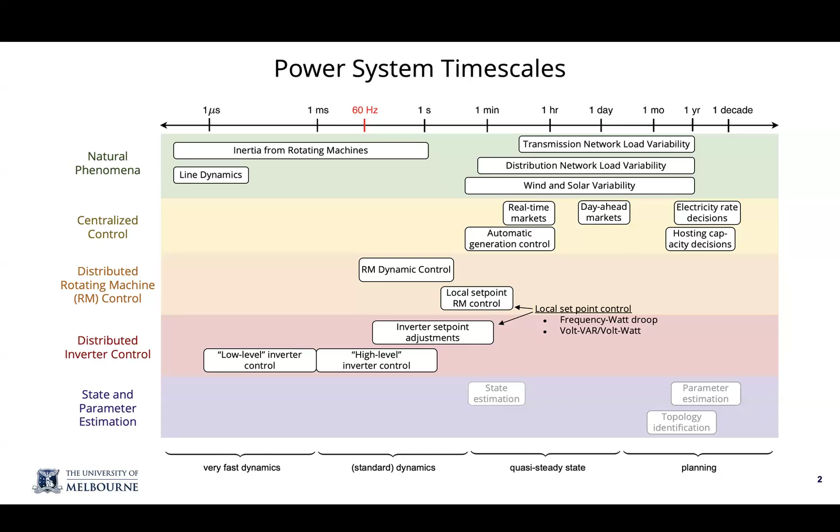This is a slide I made at the end of my PhD trying to make sense of power systems research. It makes the point that power systems research spans multiple timescales, from microseconds, considering switching frequencies of high-performance inverters, to decades, considering the planning decisions we're expected to make. If you're interested in control or optimization theory, you can find something to apply your work to somewhere in this plot.

This was my PhD focus: distribution network variability and wind and solar variability, particularly on distribution networks and how we control active distribution networks so that we can get more EV chargers or rooftop solar plants onto the network.

I left this slide in the talk so I could point out that the bottom portion, the state estimation, parameter estimation, and topology identification work, was heavily influenced by Deep's work when I discovered it in my PhD, but he's not here, so he doesn't get that shout out in person.

Anyways, this was the focus of my postdoc research. In my postdoc, I focused on dynamics, specifically how do we stabilize the electric grid on faster timescales when we lose the inertia from rotating machines. If you work in power systems, this won't be surprising. If you don't, I'll give a bit of an explanation in a bit.

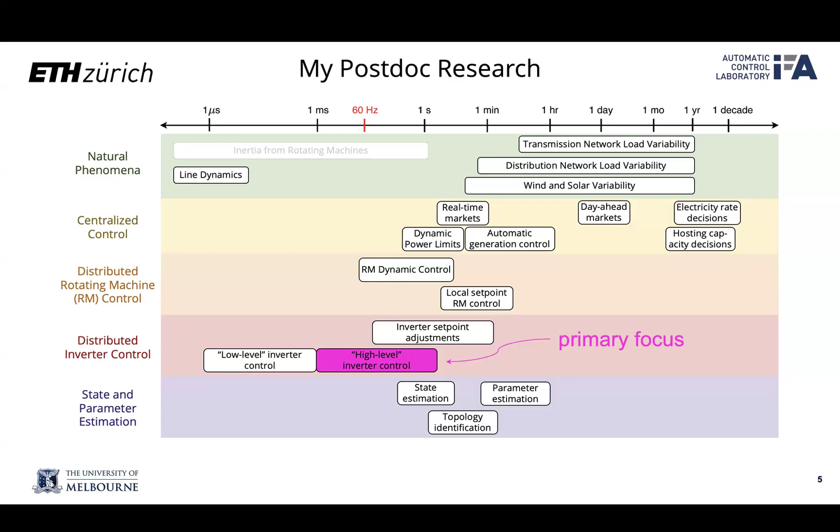It's my hypothesis, and many others as well, that much of the burden for this loss of inertia will fall on the high-level inverter control. So how do we control these inverters so that the grid stays stable, even as we lose the dynamics of rotating machines? My research is broader than that.

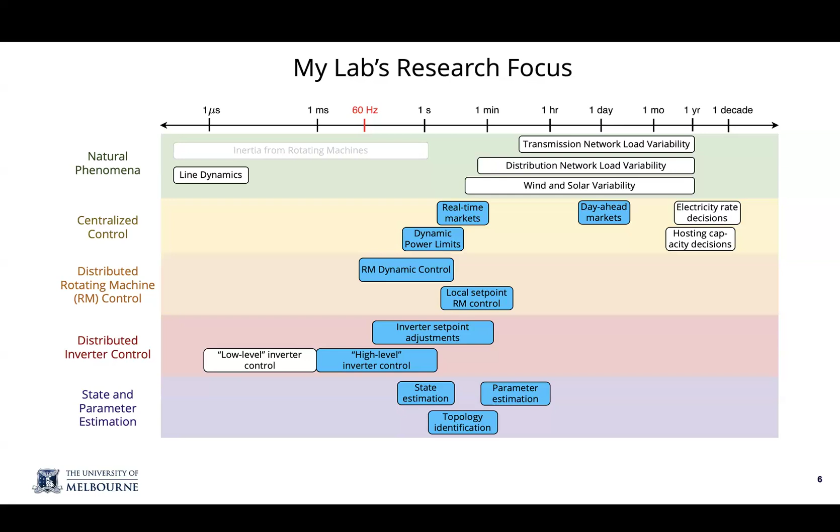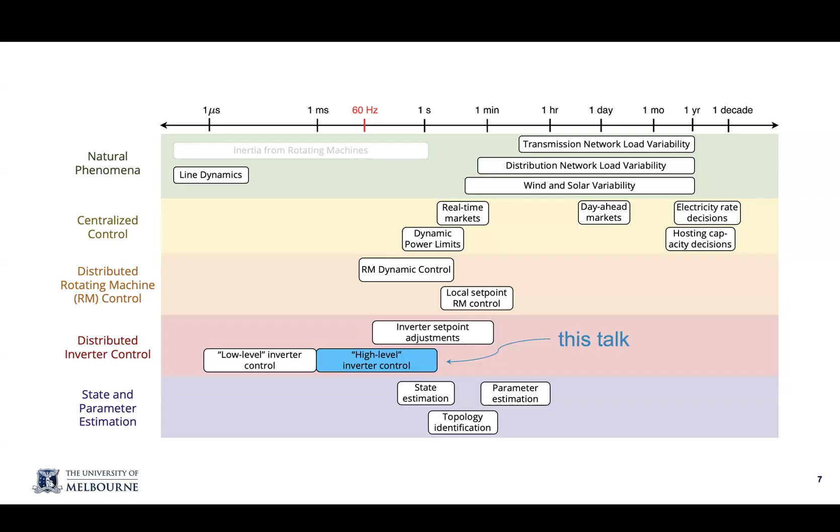I'm also interested in markets, including day-ahead and real-time markets, but this talk will stay focused on grid stability and high-level inverter control, because at least at the moment, I think this is something we really have to resolve in order to keep the cost of renewable electrification down, and for grid resiliency.

These are some of my colleagues. Perhaps you recognize some of them. Florian gave a talk here last year, I think. I also have some Hitachi Energy colleagues who I've worked with in industry, and Professor Fuso, a professor in Italy, and Anurag at TU Munich, who's helped me with hardware experiments.

So here's a bit of background for people who aren't power systems researchers. We have large rotating machines, gas plants, coal plants, hydro plants, where you spin a magnet inside of another magnet that's attached to the grid, and that creates electric power.

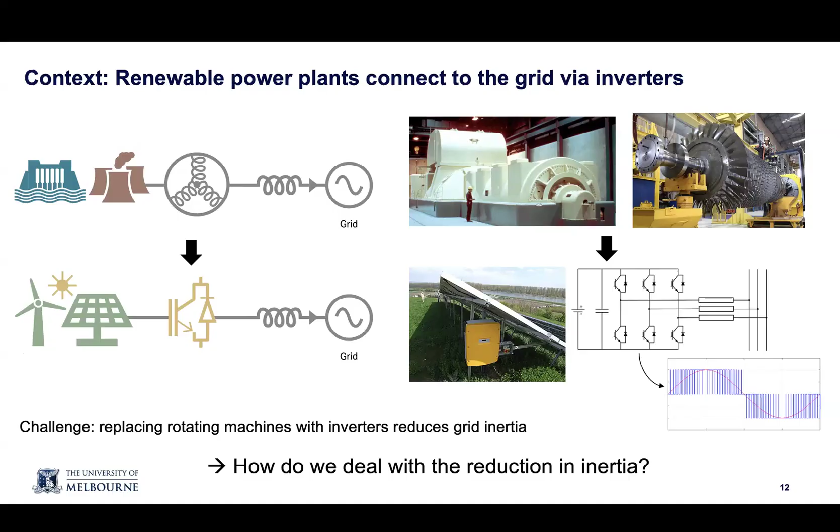So it's a very rich question. Our question as engineers isn't so much where did the oscillations come from, it's more how do we deal with the oscillations, or how do we deal with the reduction in inertia?

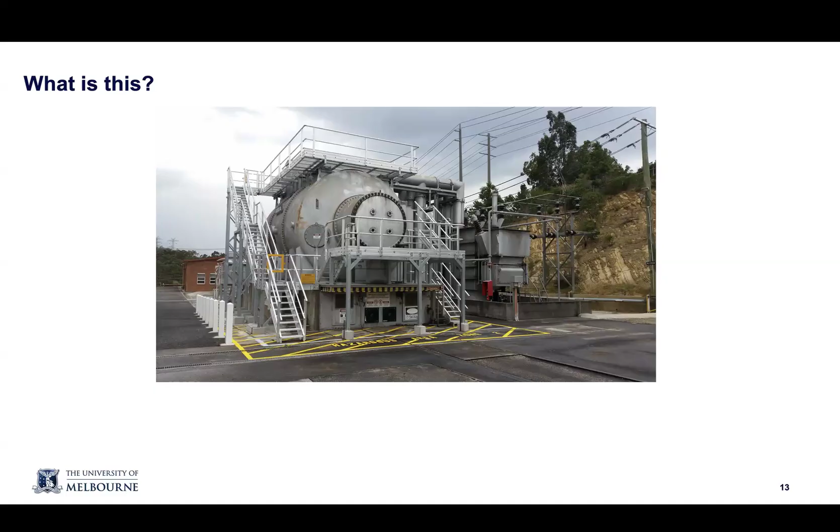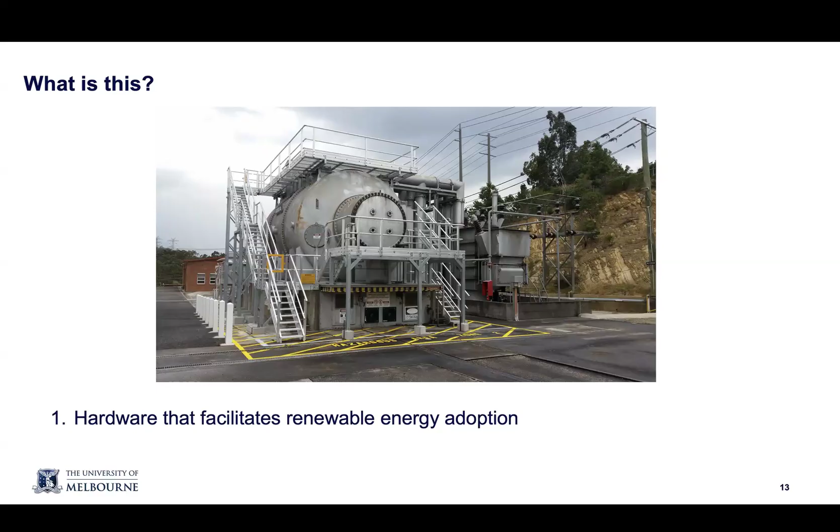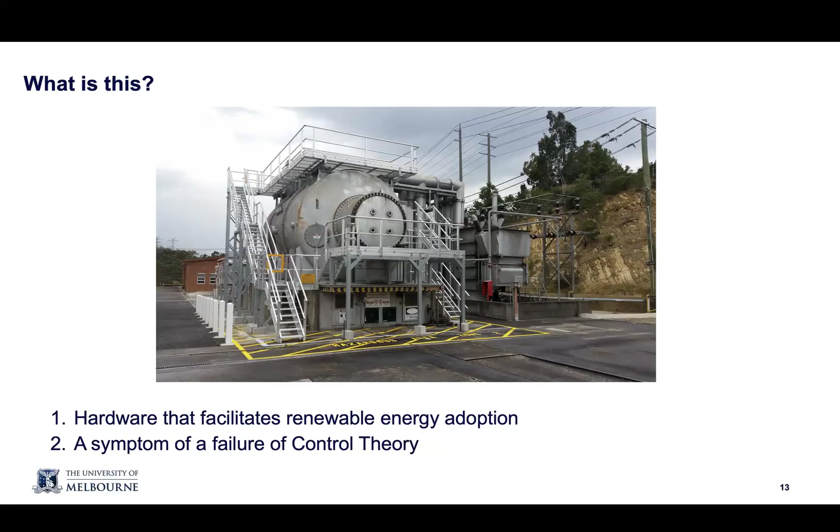Now these devices are coming back into fashion for the reason that was just asked, which is you can just build inertia. You can just attach it and you don't have to deal with the expensive burning of things to push on the turbine blades. So it could be seen as hardware that facilitates renewable energy adoption. However, as control engineers, or perhaps optimization, machine learning theorists, it could be a symptom of a failure of control theory. So I see this as a beautiful piece of machinery, but also a sign that we're not doing our jobs.

So this is the thesis of this talk: inertia is good, but we do not need it. Instead, we must get inverter control right. And I will present a new inverter control method that might be a good idea. I'm not saying this is definitely a good idea, it's kind of a weird way of controlling inverters, and it might be a good way to do things.

We're trying to figure that out and working pretty hard on it. That will include two applications - one with industry and then one with a couple academic labs.

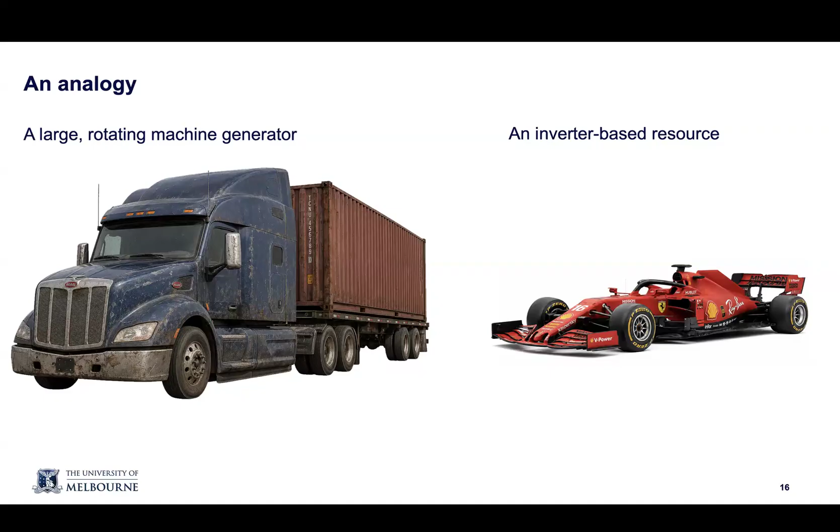This is a slide I made in response to a recent grant application response that said this is wrong, you need inertia for stability, everyone has already known that. So I made this slide, which said that this is the inertia for inertia's sake solution - we're trying to make an F1 car act like a semi-truck, and that's not really what we need to do. So it's kind of just to make a point, but this is a simulation I ran on the Kundur system with a master student at ETH, where we showed that replacing generators with IBRs can indeed produce oscillation.

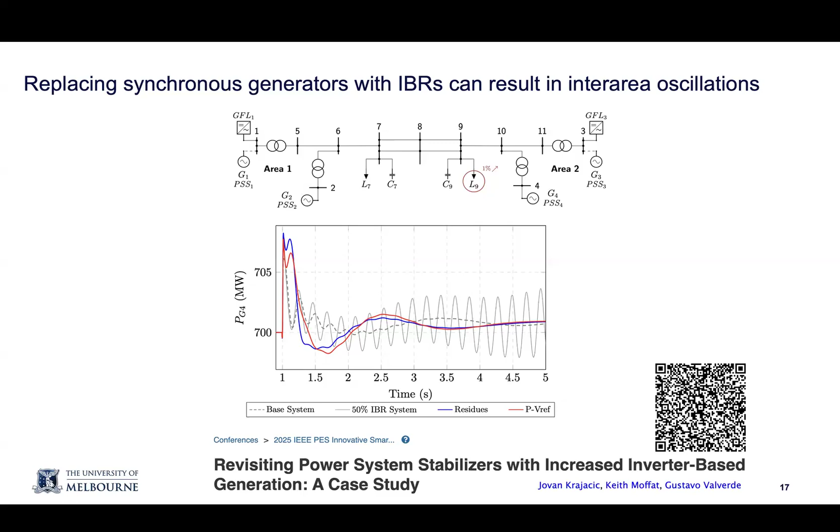So if you're removing inertia and instead putting in inverters, and then you have a fault, you get that grey line that can oscillate, and standard power system stabilizing control will not stabilize the system. It turns out if you just redesign those power system stabilizers, because you still have two rotating machines, you can stabilize the grid. So this brings it back to: if we do control right, we can handle a lot more inverters on the network rather than just throwing up our hands and saying we need this inertia.

Maybe, so from what I remember, the inverters stabilize it because they have this rotating inertia, right? Or rather the rotating machines will. The rotating machines have this rotating mass, so it has these nice synchronization and stabilization characteristics combined with a huge energy buffer in that rotating mass. Right, which is similar to this droop control, no? Well, it's kind of related. The swing equation and droop control are kind of the two parts that are the backbone of grid stability, and have been since the first AC grid.

So they work together basically, yeah, and the nice thing is that this reacts instantaneously without you needing to do anything. But could you not do the same with inverters if you switch in fast? Yeah, you can absolutely. I mean that's kind of the point I'm making: you can do droop control with an inverter, and then you don't need inertia.

It turns out there are many considerations there, because if you're responding very quickly, you might be exciting other dynamics. You have inverters interacting with one another, and everything on the grid is connected to everything else. So you need to be careful if you're driving around one car very fast, basically, or responding at a high bandwidth control speed.

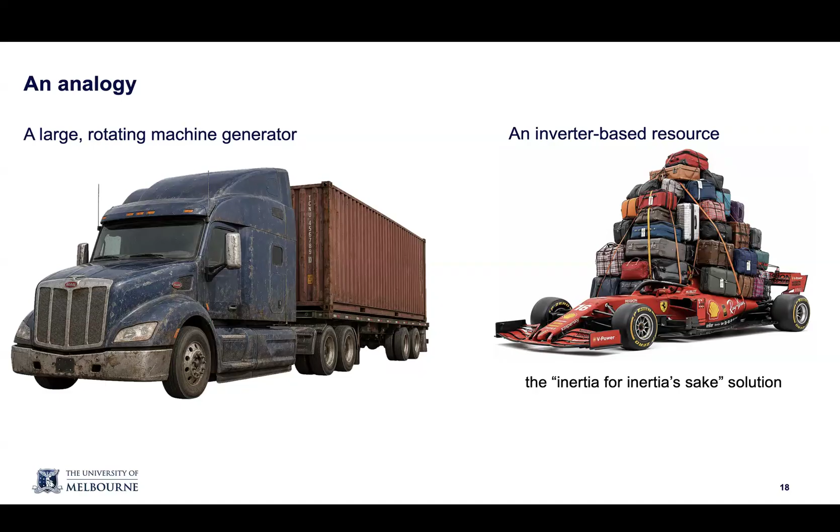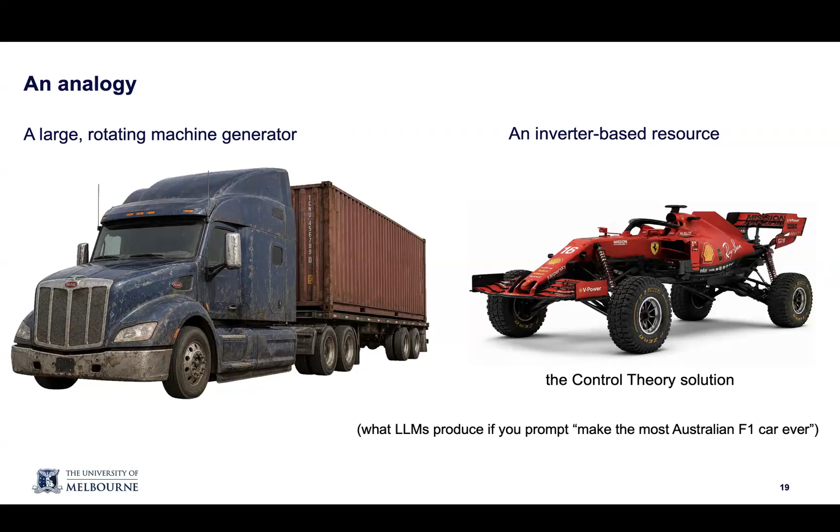But we're trying to figure out what exactly this control theory solution is rather than just a meme. So let's jump into the first application, which is inter-area oscillation damping with an HVDC line. This is when I say I will present a new control method that might be a good idea, which is on the right of this slide. On the left, we have the standard inverter control.

Almost all inverters on the grid, probably every inverter on the grid, are controlled with a box on the left: a tiered or hierarchical control scheme with low-level PWM control, then current control wrapping that, and then power control of some form wrapping around that. That power control is doing some sort of feedback control, maybe with its own time-scale separation and hierarchy, but basically you're determining the input as a function of your output. I put a Nyquist diagram there to indicate this is traditional SISO feedback-type control. You have various control loops and it works pretty well, but it might not be the control method we need because this hierarchy might be too slow, to your point.

Instead, I'm proposing optimization-based inverter control. It's essentially a time-domain predictive-type controller, so we have an MPC formulation here. Except instead of the model, we just have the word 'dynamics model' in brackets. The purpose of this talk is how do we figure out what dynamics model to use in our time-domain optimization in order to control this inverter using an online time-domain optimization. Is there any questions about this? This is, I would say, the high-level idea. Does it make sense more or less?

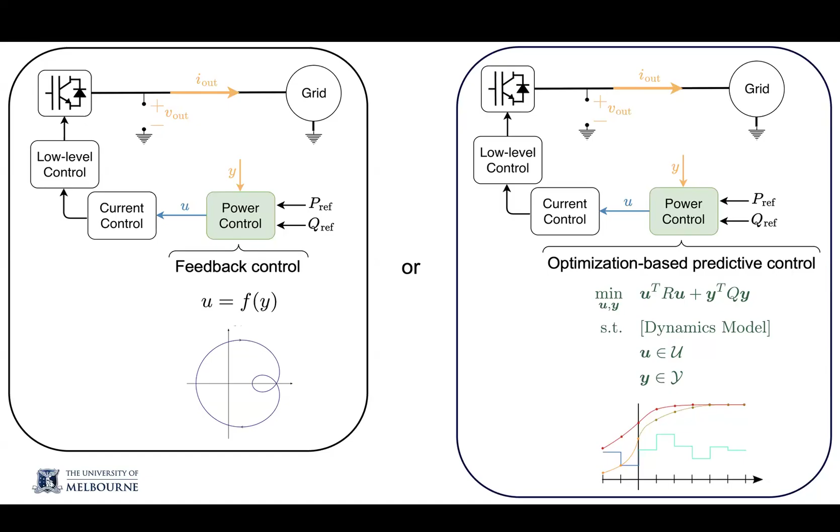So it's a local model. I'll get into what I mean by that. But first, let's say why do something different.

The first, and I would say this is really the key reason, is that we have explicit output constraints. These inverters can't go past a certain output current, and that is a critical limit of that hardware. So we can program that in explicitly.

The second is that it allows for intuitive objective programming. Here we have the cost function, which is just a quadratic cost function. If you're using too much control effort, you just increase that R matrix, or if you really need to settle faster, you can increase the Q matrix. It's kind of standard MPC or LQR motivations here.

And then the third motivation is that MIMO is easy, right? Standard Nyquist-based methods are typically SISO, single input single output. Whereas the electric grid at any point of interconnection is at least 2 by 2, because you're working in a rotating reference, at least the D and Q components of the balanced 3. So the challenges arise: one, how do we do prediction, and two, what is the online optimization?

So the answer to the first one is that we're going to use data-driven predictive control.

Can you say something about what the time horizon is? Because U is a vector, right? So I guess... Exactly. So this asserts a time horizon, whereas in traditional feedback frequency domain type control, you don't have a time horizon. Whereas in MPC, you always have this time horizon. And the time horizon needs to be long enough to capture the dynamics or constraint violations that you care about, but not so long that the optimization becomes intractable, meaning that it will be forecasted. Exactly, yeah. Okay, so it's a generic time horizon that we pick suitably.

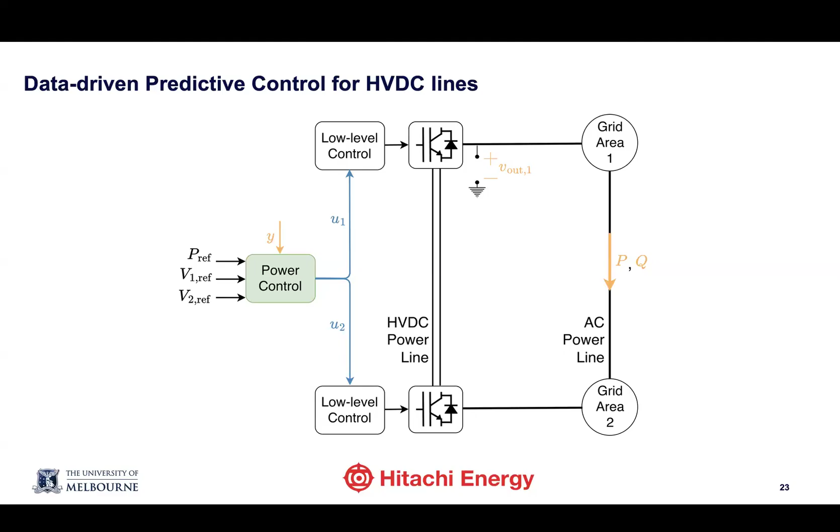Now, the idea is, can we use power control sent to inverters on either side of the HVDC line so that the inverter injections dampen the oscillations? And this is a problem that Hitachi is interested in, because Hitachi builds HVDC. So if they can provide plug-and-play solutions to customers, that's of value to them.

So this is their grid model that they use. This is a toy, this is not an actual grid model. It's just the Kundur 2-area system copy and pasted above and below, connected through one AC line and one DC line. So it looks like that system I just had up, and they have their proprietary HVDC inverters in their model.

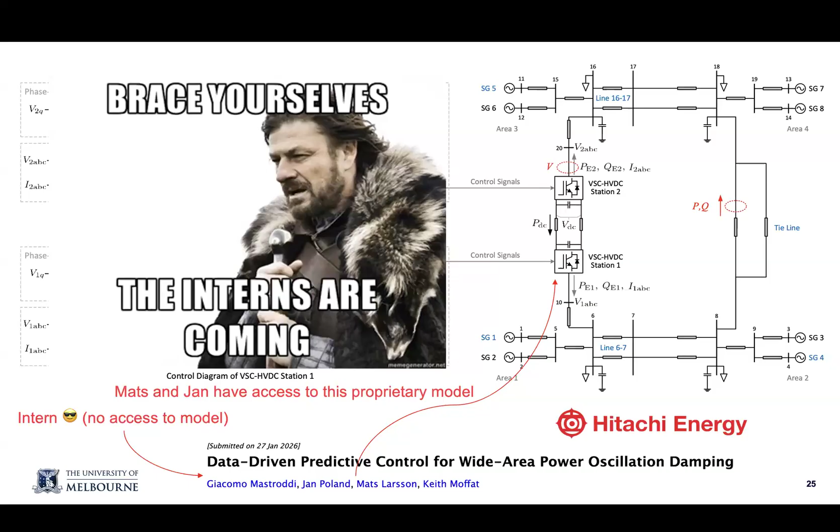It turns out that access to those converter models depends on what stage of engineer you are at Hitachi. This is a core trade secret, how they control these inverters. Giacomo, a student I worked with, described the model as super top secret. They never even considered letting me look at it. I wouldn't have wanted to anyway because I probably couldn't understand it. Whereas Mats and Jan probably can see it, but they're not allowed to share it. It's NDA, essentially.

So the idea is, can we control these inverters at these high-level inputs? Can we give voltage references or power references at a higher level, and then learn the dynamics of the lower-level controller and of the grid at the same time? So we're not just learning the lower-level controllers, we're also learning the aggregate behavior of the whole system as seen through the points of connection for this HVDC line, such that we can dampen the grid oscillations.

The problem is you need an accurate system model to get this plot, and in practice we do not have models of the grid of this accuracy. So when those AEMO engineers were saying, well, we don't know exactly what's happening, it's because they have a pretty good model of the grid, but then you actually have the true physical system, and there's always a mismatch between the two.

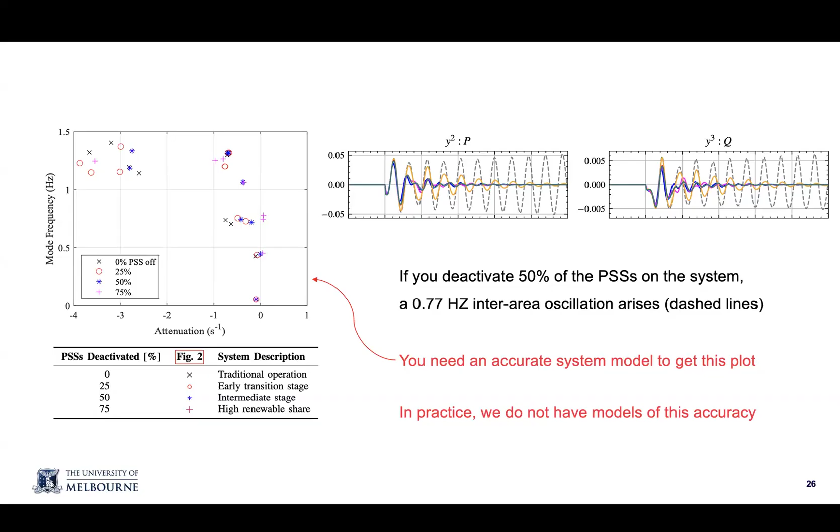Lunch was served, so I'm going to make some progress.

This is a slide from a different talk I give on the eras of control theory - kind of a fun history of control theory talk, making the point that we're now in a new era where we've departed from the state space era, where we worked with A, B, C matrices with a clearly defined state dimension. Now we're trying to control systems that don't have a clearly defined state or even state dimension. If you're controlling an inverter connecting to the electric grid, you have no idea what the state of the electric grid is or even what dimension it might be. We're trying to control this incredibly complex interconnected system, and it's not clear exactly where we would even start if we wanted to identify A, B, C matrices.

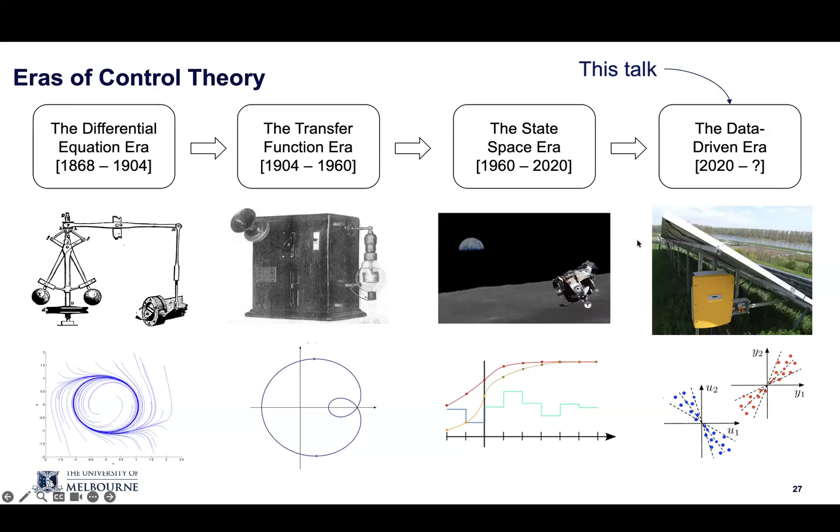So that's going to be this talk, and there are two types of data-driven predictive control methods: the indirect or more classical type approach, and the direct, which is what we're going to focus on in this talk. The indirect approach includes subspace identification, or if you've ever used the N4SID algorithm in MATLAB, where you identify A, B, C, D matrices up to some similarity transform - this is the more classical Lennart Ljung indirect approach where you're going through a state space.

So will you have different models for different situations, and then you have like different linearizations of your nonlinear system? Yeah, we had an L4DC paper probably being presented right now on that. That's an active area of research, and it's a super exciting area because LTI methods work, right? And they're somehow explainable, although the world isn't LTI, so it's always a given.

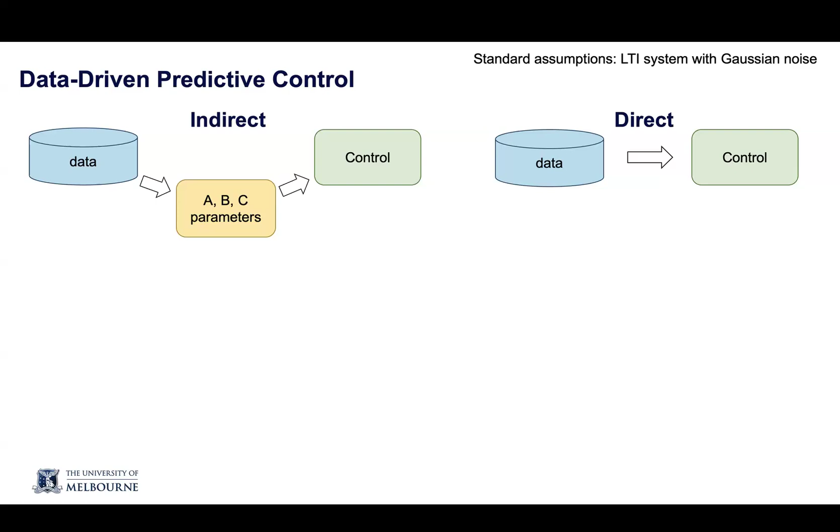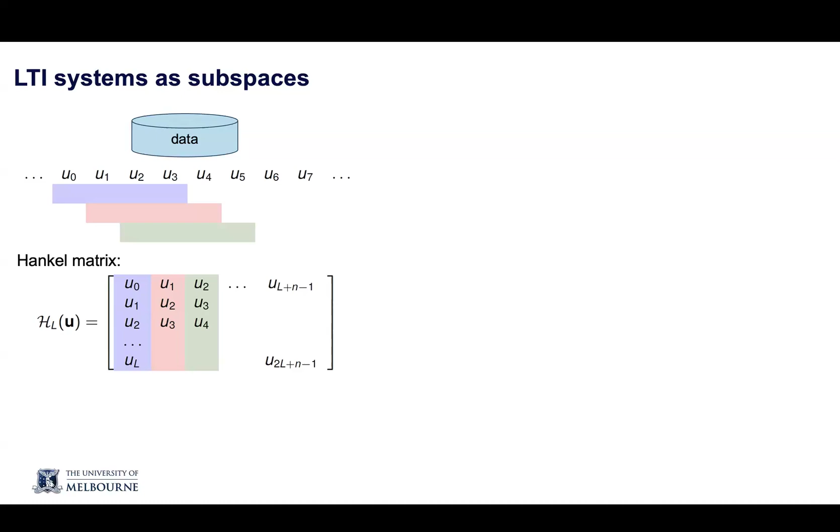So just a bit of background on what we mean by direct control. This is a Hankel matrix - if you hadn't seen this before, essentially you're going to collect your data and partition it. You line it up in time and partition it, taking trajectories that are all L long. So L is some number, and you take L measurements and put them in one column of your matrix, then the next L measurements into the next column, and so on, building a very wide matrix with a number of L-long trajectories. It turns out that for a noiseless LTI system, all valid L-long trajectories can be generated as a linear combination of what you've seen already.

So if you shake your system enough and it's truly LTI, and you live in some other universe where you can get noiseless measurements, then any valid system trajectory will be a linear combination of what you have seen already. This is kind of the miracle of LTI-ness, it's superposition.

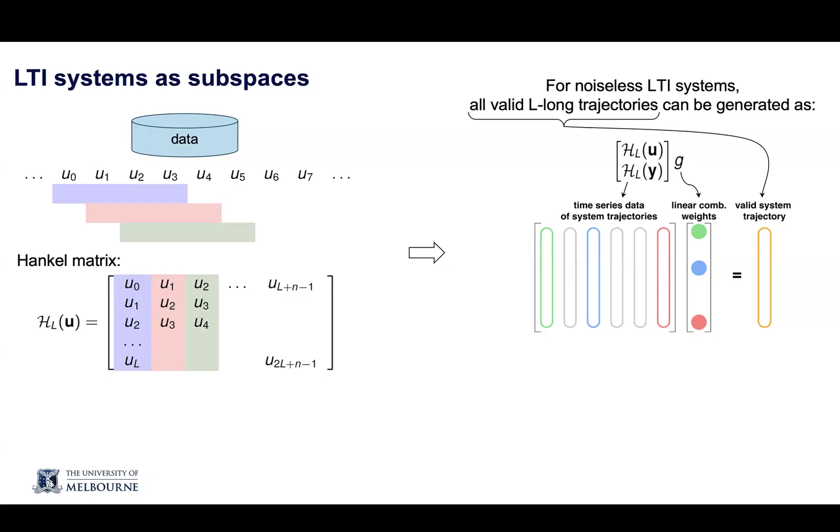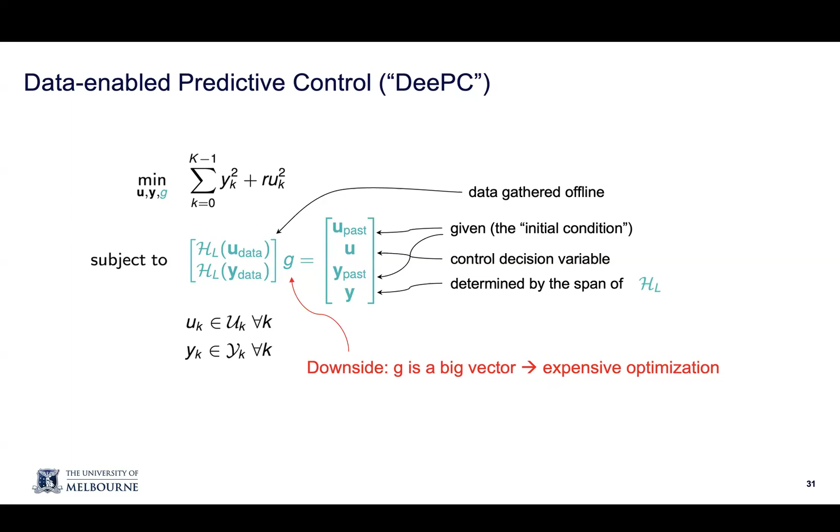So the superposition can be used for control. This is the much celebrated data-enabled predictive control algorithm, which builds on top of Willems' fundamental lemma, where essentially instead of identifying the system offline, you just get this really wide Hankel matrix and you optimize over G online. You optimize over this linear combination vector that is linearly combining the columns that you've seen already, and somehow it's doing the system identification, state estimation, or localization, determining the initial condition, and optimization all in one pass, which is pretty cool, but also very expensive. By including that whole Hankel matrix, you're carrying around this giant Hankel matrix and optimizing over it every single time step. So G can be a big vector, and this is a very expensive optimization.

So it turns out that there are other representations of LTI systems. We talked about state space and subspace methods. So what I just described is a subspace type method where you're optimizing over a subspace. There's also this other representation for LTI systems, which are ARX type models, where you just do single step prediction and you can iterate that single step prediction forward in time. And that will be, or has been, the focus of my work for reasons that I will get to.

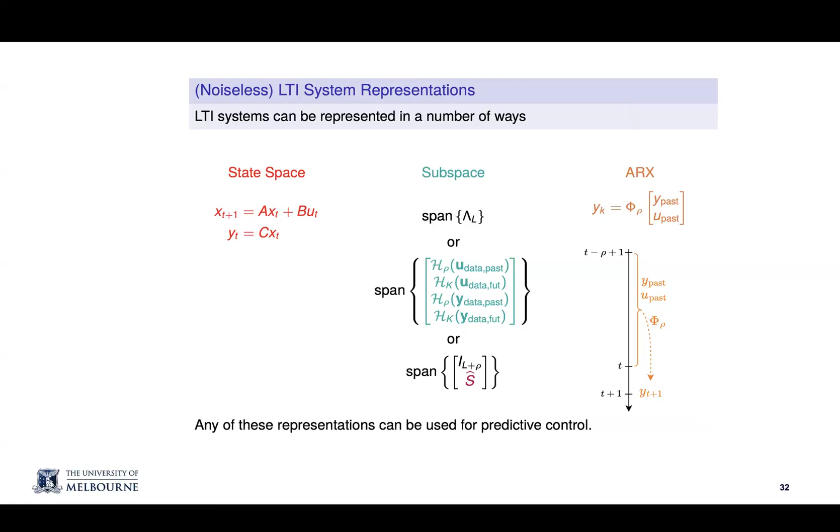One of the big ones is causality. If you're iterating this single step predictor forward in time, you know that an input at time 2 is not going to affect your output prediction one step in advance, whereas the subspace methods don't have that advantage. So these ARX type methods, what I've called transient predictive control, is a specific type of an ARX type method, is one way of doing it. We talked about the CDC, but I'm not going to dwell on that this time.

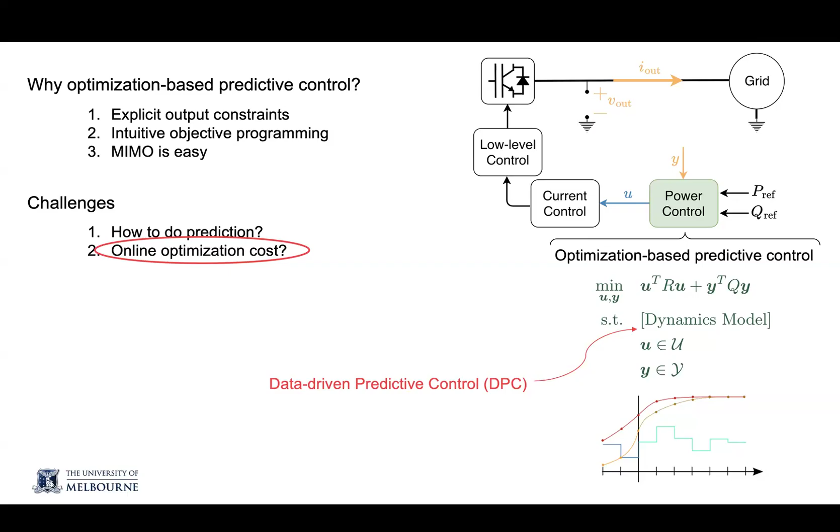So we're running this massive online optimization. We figured out one way of making it smaller by moving away from DeePC and going to these ARX type methods. But can you actually run an optimization in less than a millisecond? With standard feedback control, you're making a control decision at least every millisecond. It turns out with these modern optimization tools, these splitting methods, we use OSQP and SCS, and they are really fast, quite impressive.

In particular, because we're dealing with LTI dynamics, our constraints are LTI and our costs are quadratic. So we've made it as easy an optimization problem as we can, and OSQP is able to solve the transient predictor, this ARX type optimization, on the order of microseconds. It does cool things like pre-caching the matrices for the KKT conditions, which I dove into after Giacomo produced this plot, because I said there's no way it's doing this reliably, and I found there's some basis for it.

I think this is an important mind shift we as engineers need to have these days: easy optimizations are about as expensive as matrix-vector products, and it's reliable, you will always get a solution because it's convex. There are convergence guarantees, and it's really fast. So if we keep our optimizations as quadratic programs, I think that's a tool that's still underutilized, and that's one of my more abstract hypotheses motivating this work.

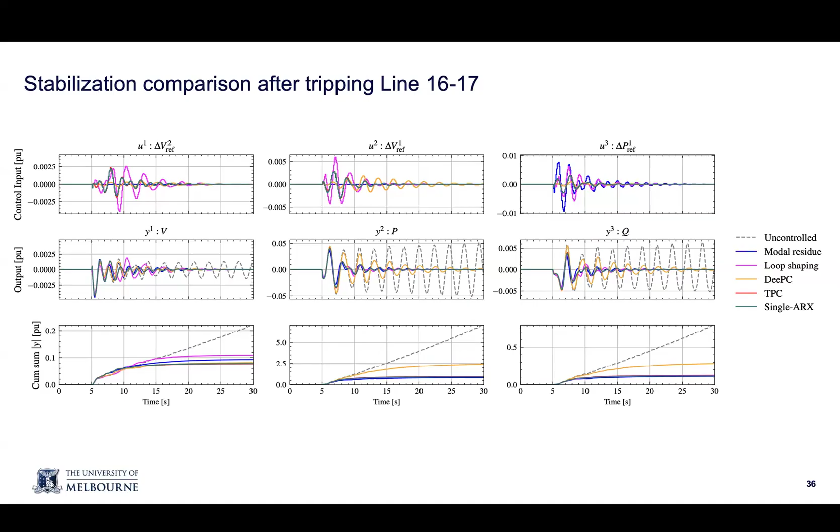And that's why it's surprising to folks like the Hitachi guys. I guess this works, but it's a bit unnerving to them. But if it works, it works. So you've got to push it until it doesn't, or hopefully we can get it into the product.

Okay, I'm gonna keep going. So for the outer loop control of this system, the LTI data-driven methods work about as well as the model-based methods. We didn't try to say this data-driven method is better than that one, because there are so many hyperparameters you can tune. I don't want to say mine's better than this other person's. It's more a general point that they're working pretty well.

Let's keep pushing on this and see where the limit is, because it's not here yet. I guess it's difficult to prove this because you don't have a model. Generally, what do we have in time domain model predictive control? We have recursive feasibility type results and things of the like. So it's a bit unsettling to traditional power system or control engineers. I give this talk and people read it, and I don't know what to make of it, but it worked.

Question: I know that in your previous work you guys also work with standards. So when you think of a particular control method or algorithm to get it implemented into a real inverter, to be bought by the standards organizations, what do they want? Are simulations enough, or do they want theoretical guarantees?

It depends on where you are in the world. AEMO has, I think, a really innovative approach to grid connections, which is they just have a set of benchmark tests and say, look, you need to do this well in the benchmarks. For other methods, I would say there's not a lot of unity amongst the various TSOs about what it means to get incorporated into a system. So it's a bit unclear right now, I would say. But there are some grid codes that are just benchmarks, and if you do well in the benchmarks, then there you go.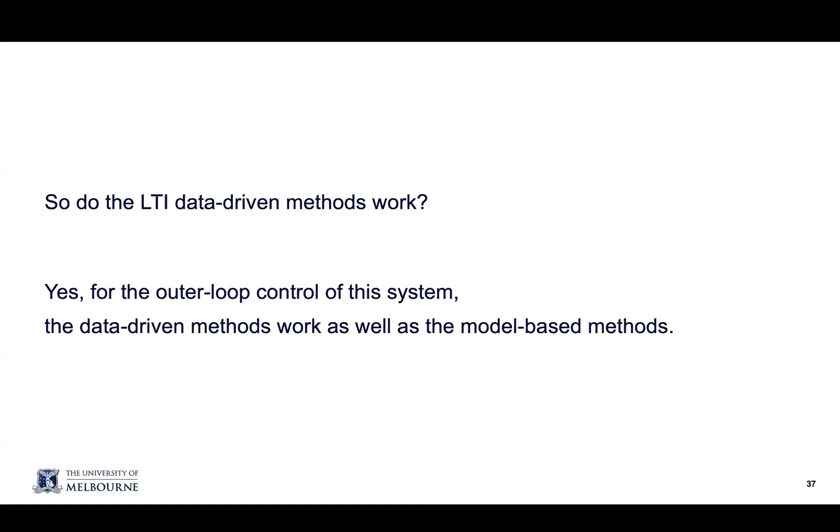So that was optimization cost. This is just making the point that it's fast enough, right? We're talking about dynamics in this range, controlling inverters in this range, so the optimization sits in this range.

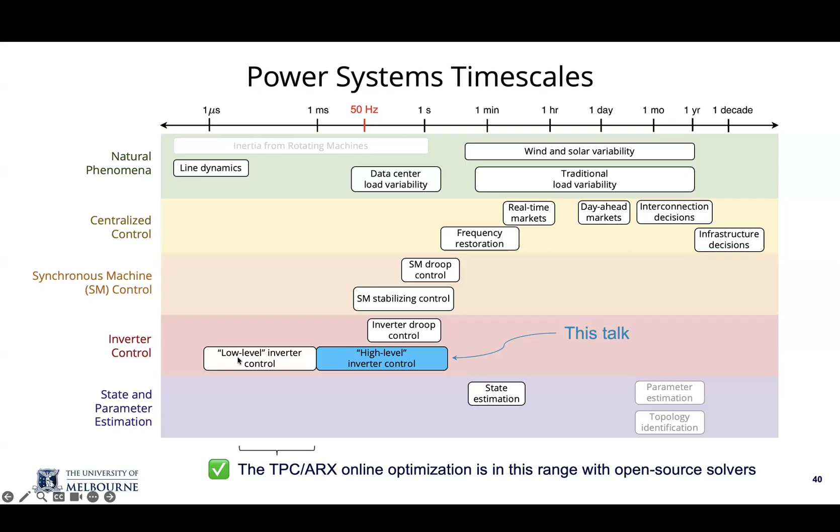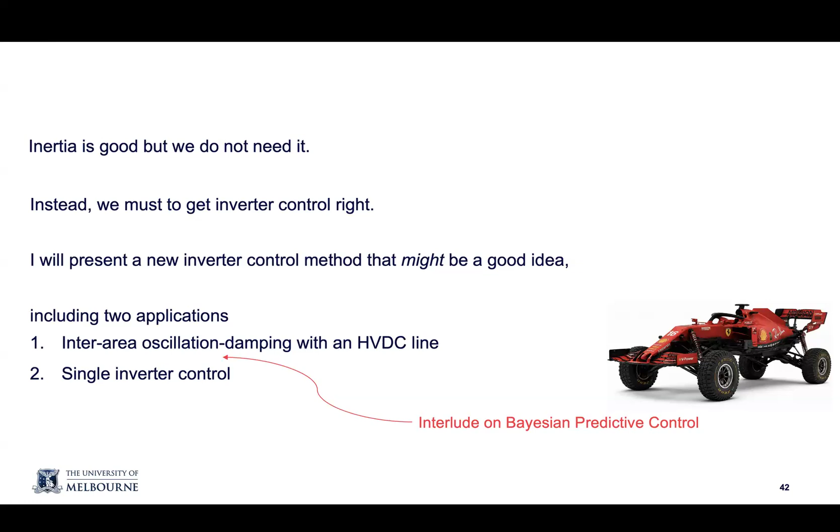We're good to go. So now we're going to do a bit of an interlude on Bayesian predictive control. This is the control theory that I've been working on, a bit of a departure from power system theory. The motivation for Bayesian predictive control, or the Bayesian approach, is that we care about performance on the real world system. We don't care about performance on our model or on our maximum likelihood estimate from data.

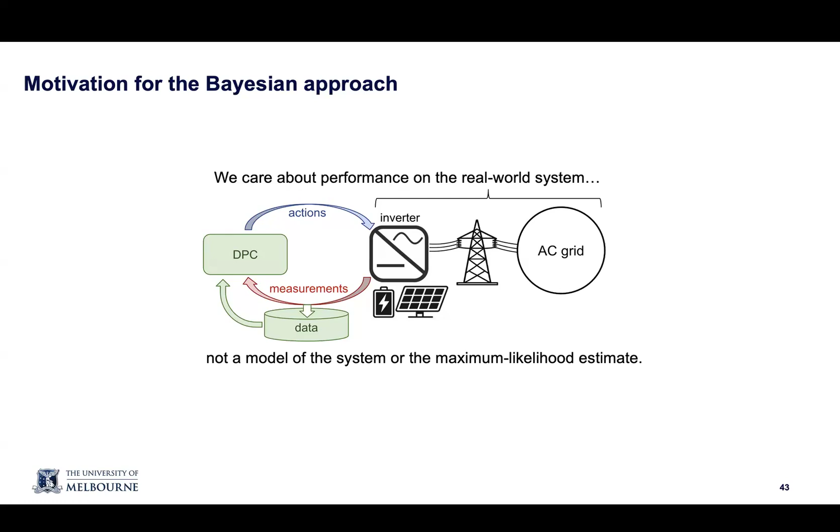So you have your maximum likelihood estimate, your model, whatever. When you put it on the real system that generated that data, how will it perform? And we're also in a noisy world where your maximum likelihood estimate is going to be wrong. So this brings us back to the indirect and direct distinction.

Here we make the point that in the indirect method, going into a bit more detail, you gather the data, then use the data to do system identification, and that system identification is used in MPC, and then also you have a Kalman filter. So the column on the left is kind of a standard LQG, or system ID plus LQG, type approach. But we know from this celebrated paper that this is not robust. Just controlling for the maximum likelihood estimate of a model might not actually stabilize the true system dynamics, because Kalman filter plus LQR can actually be very brittle in terms of its stability.

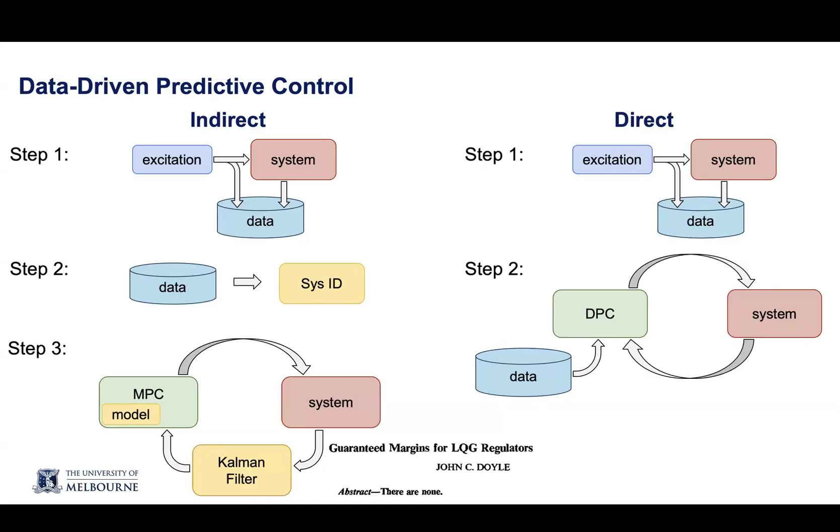So can we do better if somehow we stay in this direct domain? That's essentially the promise of what I've started calling Bayesian predictive control, where we're going to use both data and external information—any sort of bias about what the system dynamics might be, or hypothesis about the system dynamics—and fuse them into control using Bayes' rule, essentially. What we're after is the expected performance on the true system.

So this is your cost function for the true system. This is your true output conditioned on the data you've seen. And implicit here is you have a prior—the prior could be informative or uninformative if you don't have one. But ultimately what we're interested in is this performance on the true system dynamics conditioned on data.

So why Bayesian? The first reason is accounting for uncertainty. You've learned system dynamics, and accounting for uncertainty will give robustness. The second is that you can use external information and data, since rarely are we in a system where we actually know nothing about the system dynamics at all.

We might assume they're stable or somehow smooth in some way, or perhaps we know it's a double integrator and we just don't know the mass.

We would like a mechanism that can incorporate external information. So first, let's talk about accounting for uncertainty and how that might give robustness. I don't think we'll have time nor interest to step through the specifics of the math on this slide, so I'll just go fast. But basically, this is the stochastic optimization we care about, but can't actually solve. So we have this conditional expectation, and it turns out that can be solved approximately by a regularized deterministic problem. So we just take the cost function applied to the a posteriori estimate of the system, which we got through Bayes' rule.

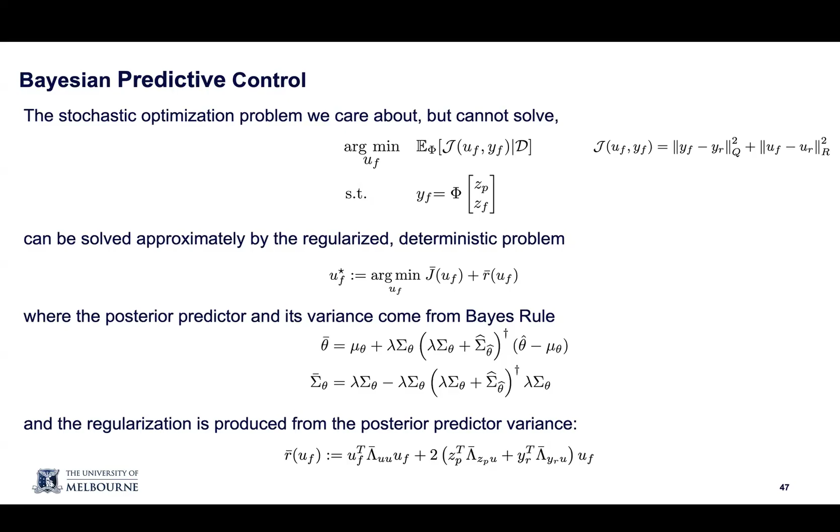So in some way, we're incorporating our prior and our maximum likelihood estimate and crunching that into a single a posteriori estimate, and then we get this other regularization term. These results, I think, you basically always see in machine learning and control because it gives us something we can actually optimize over. We have the problem that we care about, and then somehow we end up with just a deterministic optimization with this additional regularization term, which is nice because that term reminds you that you don't actually know the system dynamics with certainty.

You need to account for that uncertainty every time you make a control decision. So accounting for uncertainty gives robustness, and then the second point is that if we combine external information with data, we can really reduce the data's explanatory burden. We can reduce the lift that data has to perform.

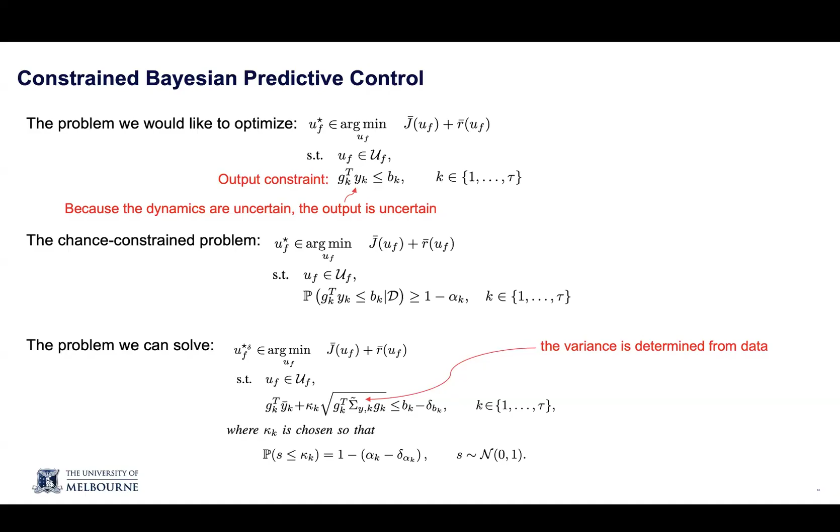So that's the control theory stuff. We're getting back to power systems. We're also running out of time, so I'll keep going fast. This is single inverter—or, I should stop. Are there any questions about this?

Okay, let's keep going. The chance constraints are around the modeling inaccuracy, right?

It's the a posteriori accuracy. That's fine. So it's the combination of your modeling or inductive bias and the informativity of your data.

So you crank those through Bayes' rule, and you still have an uncertainty ball on your prediction, and it's a chance constraint on that. But it doesn't have, in real time, the measurement that you are getting if that has errors—because I think you can also do that. There's many ways, but somehow it knows that the measurement you've just gotten is uncertain.

I would say it's like a comprehensive uncertainty, because baked into your training data is the fact that the measurement you just got is going to be noisy. It's all baked in, right? I'll have to send you a paper before I say more. So it's all baked in, which to me is exciting. It is still for LTI Gaussian noise systems, so it's exciting to extend past that.

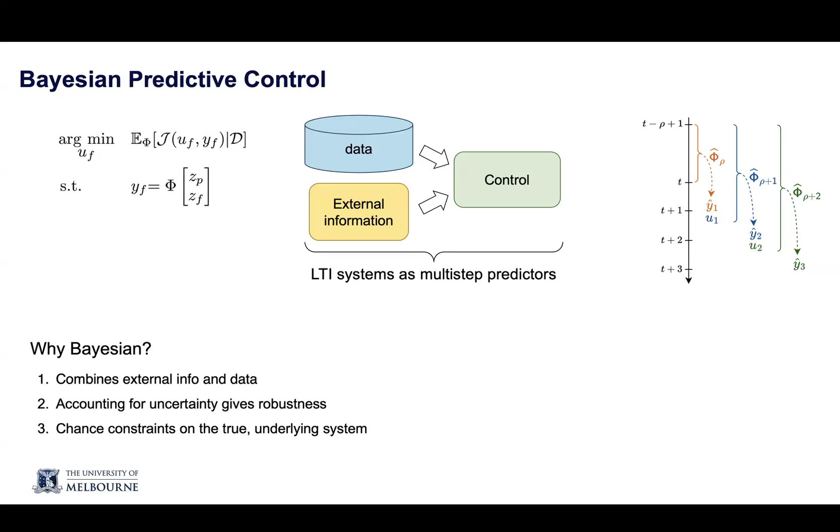Other questions? Okay, let's get the talk done and go to the full question session.

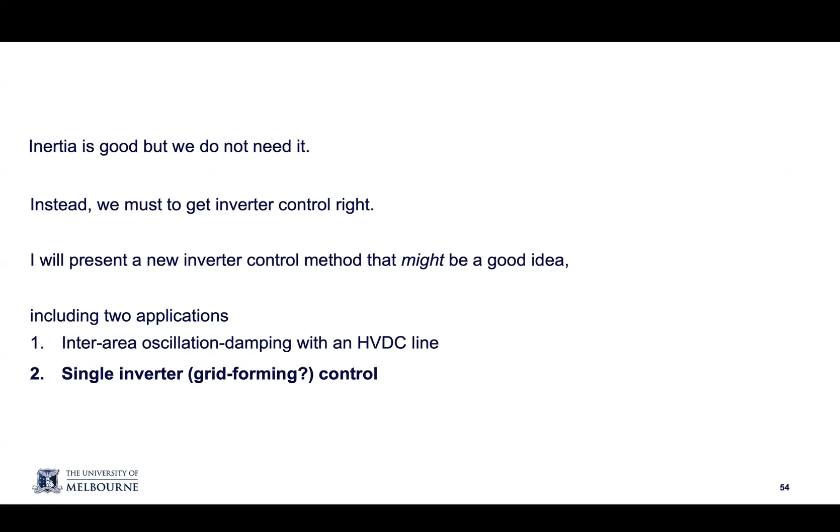So back to power systems. That was the HVDC line stabilization we talked about previously. Now we're going to talk about single inverter control, where we have rotating machines and inverters.

If you're not a power electronics engineer, a really critical thing to understand, and something power electronics engineers always jump up and down on the table about, is that inverters have constraints. You can't go above 1.2 the rated current. At the end of the day it's a switch of some form, and that switch gets too hot if you put too much current through it.

All these inverters—this is a very large one—have strict current limits. That's one of the reasons these predictive methods, where we're worried about constraints when actually controlling these systems, are a real benefit over frequency domain type methods. This term 'feasible VSM' stands for feasible virtual synchronous machine: an inverter providing virtual inertia without violating inverter constraints—so do your best to act like that thing on the left, but don't melt.

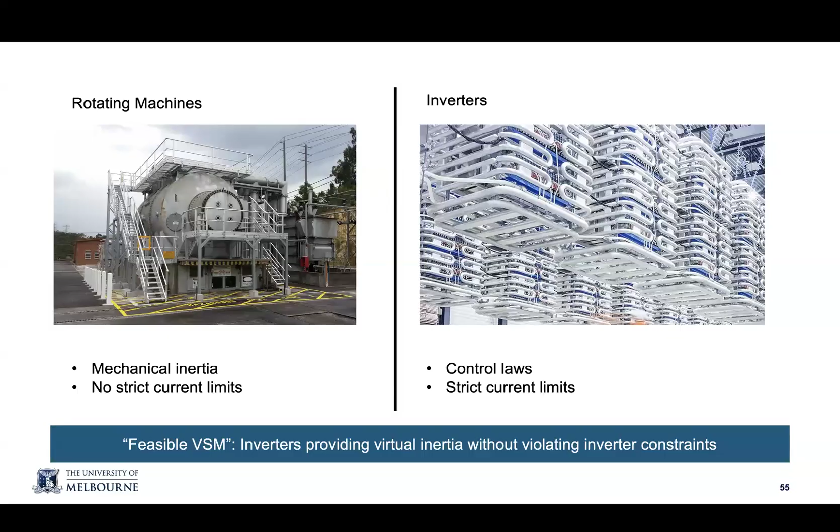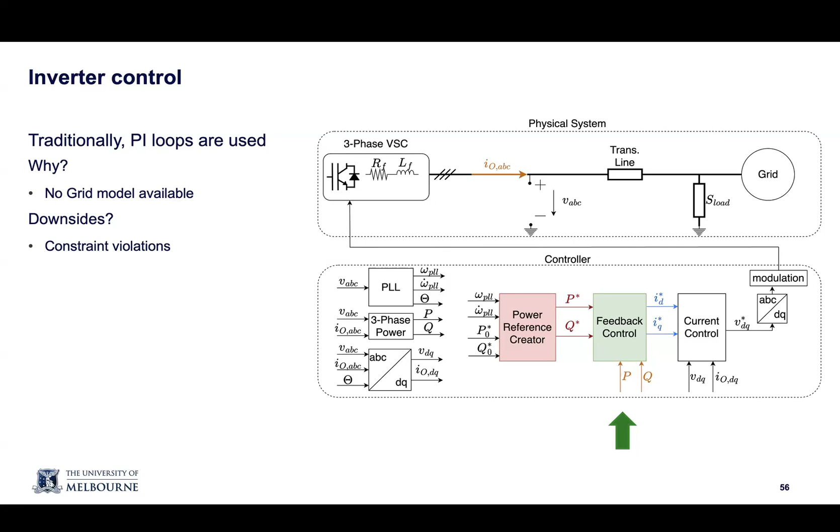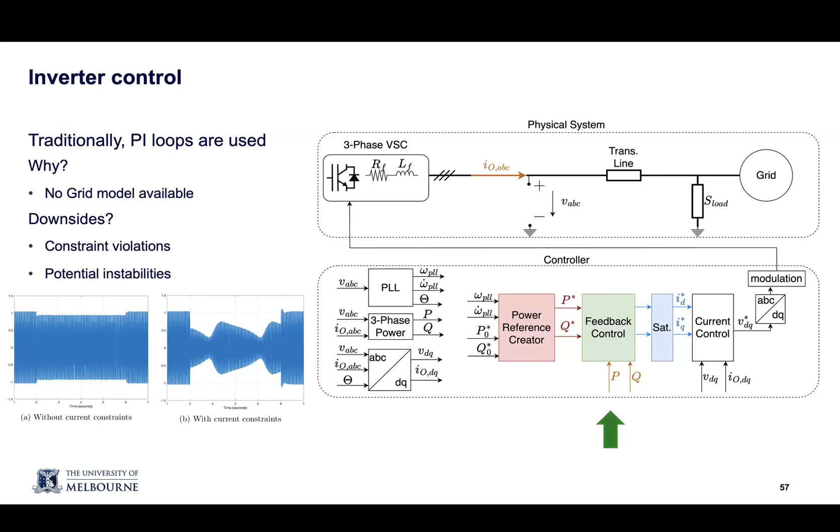Inverter control has traditionally used PI loops, for a number of reasons. First, no grid model is often available, but PI is super robust. The downside is constraint violation—PI control doesn't provide constraint guarantees. So what gets put in practice are saturation blocks and other clever engineering tricks, such as virtual output impedance. However, these things can interact with each other. Virtual output impedance and saturation blocks add nonlinearities that aren't otherwise accounted for, and it can lead to undesirable effects. So we'd like to avoid using that.

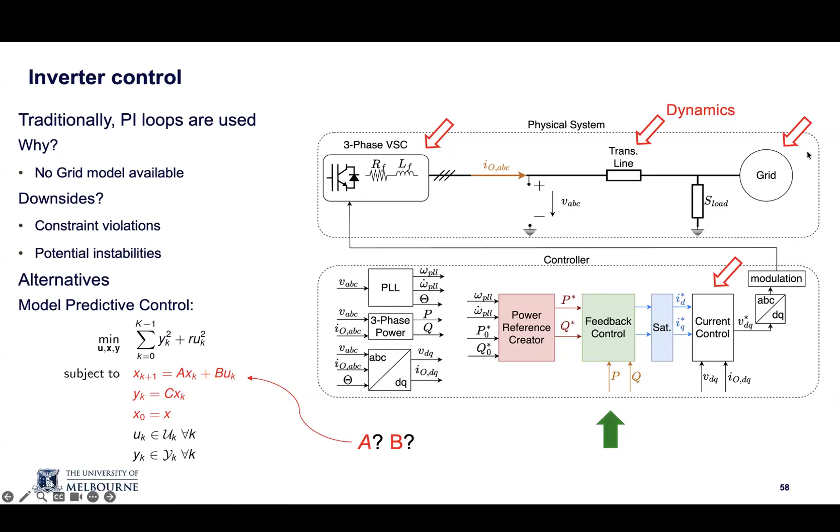The traditional approach to avoiding constraints is model predictive control. We talked about this a lot, so I won't dwell on it. In practice, we don't know the A and B matrices that describe the full system—in particular we don't know the grid we're connected to. So what do we do instead?

We use data-driven methods where you gather data from the system by perturbing the inverter—whether it's a small or large solar panel or battery—shaking the system and observing how it responds, putting that data in a repository and using it as the predictive model. Then the cost function acts to provide a rotating machine response plus droop control.

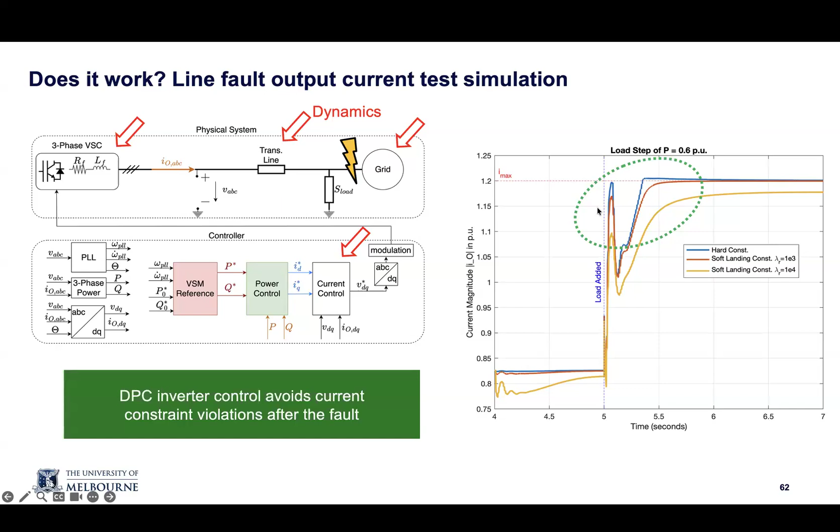This is really the backbone of grid stability. Here's an example where a fault strikes the grid in simulation, with dynamics that could otherwise lead to constraint violations, but this predictive controller—controlling the green block—is able to keep the current below that maximum. So in this example, DPC inverter control avoids constraint violations after the fault.

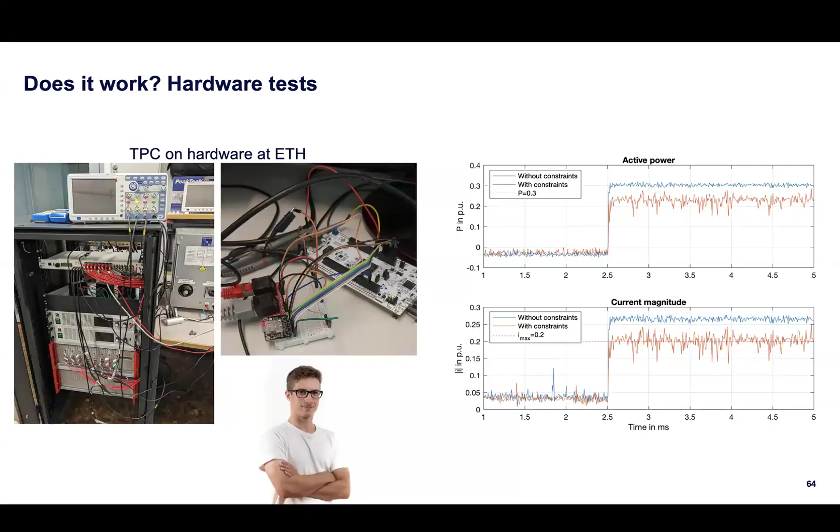So does it work? Here's some hardware tests we did at ETH. Sebastian, a master's student I supervised, did an awesome thesis showing that running this data-driven optimization on just a 35 dollar piece of hardware—taking advantage of modern hardware and algorithms—we were able to successfully control this inverter in the lab.

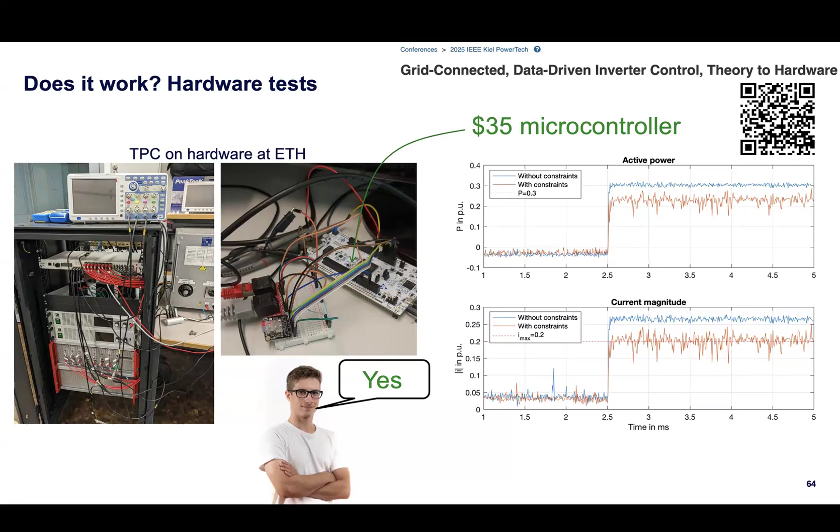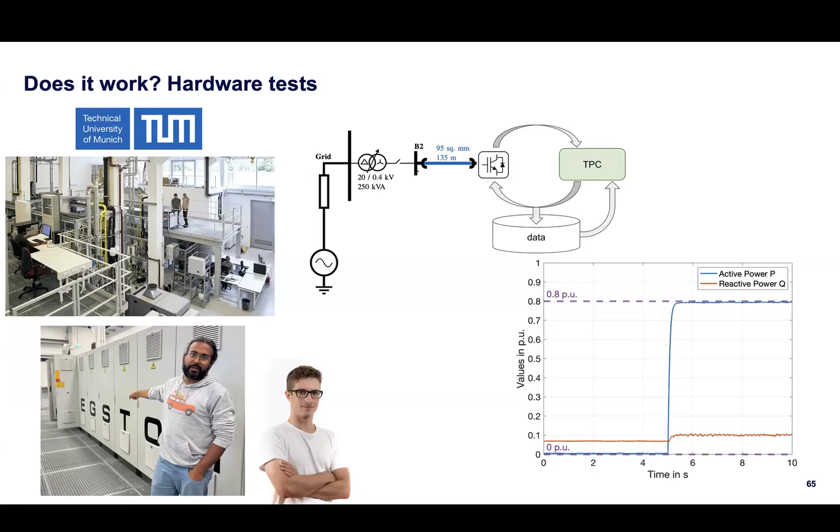Afterwards, we went to TU Munich after meeting Anurag at PSCC, and controlled his Egston 25 kilowatt inverter, connected to the Munich electric grid. This was, to my knowledge, the first time data-driven predictive control has ever been connected to an actual electric grid with all its dynamics. Sure enough, we were able to track the output. There are many more tests to do, but this was a promising preliminary result on this case.

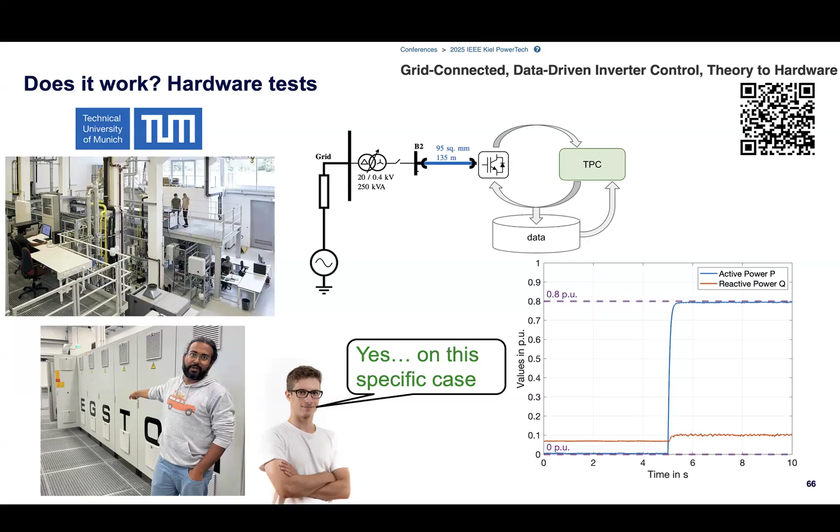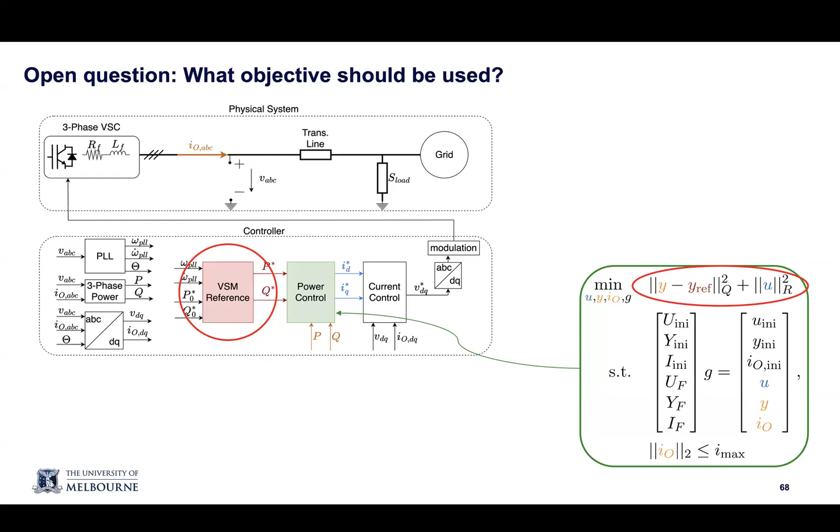So that's where we're at. The big question—I promised you a big, exciting research question at the end, and here we are: what objective function should we use? Up till now I've been talking about virtual inertia, or feasible virtual synchronous machines, because the grid has always been stable more or less thanks to an inertial response plus droop control. So let's start with tracking that.

However, that looks a lot like this if we're thinking through analogies. Does anyone know what this is on the right?

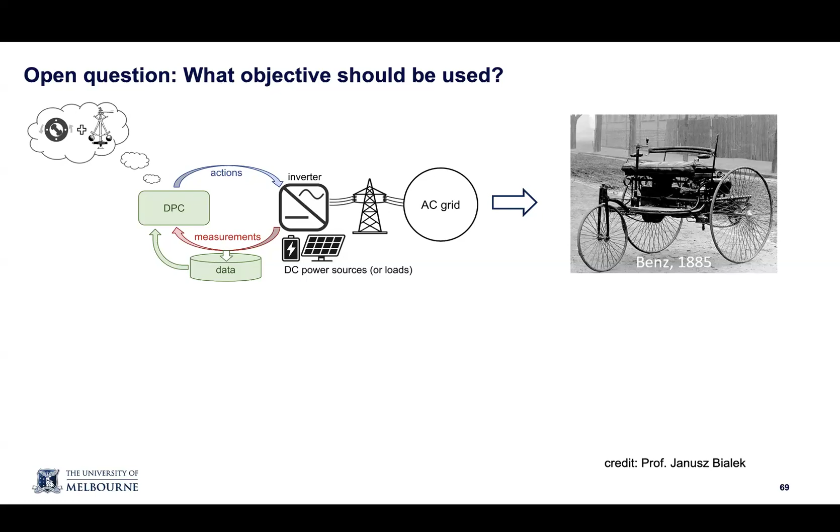But just 20 years later, we have this, right? Which looks very old and cool, but like a modern automobile where you have the engine in the front and the seats in the back and the steering wheel. So form fits function, function fits form. We have to figure out what that means.

So I think starting with virtual inertia and droop control, droop control is definitely a good idea. Virtual inertia is probably a good idea, but perhaps we can do better.

And this is the kind of research question that I'm really excited about, which is how you have all these self-interested inverters that just want to be connected to the grid. How do we control each one of these inverters, or somehow create bounds with grid codes, such that when they all participate together, we get a stable aggregate response?

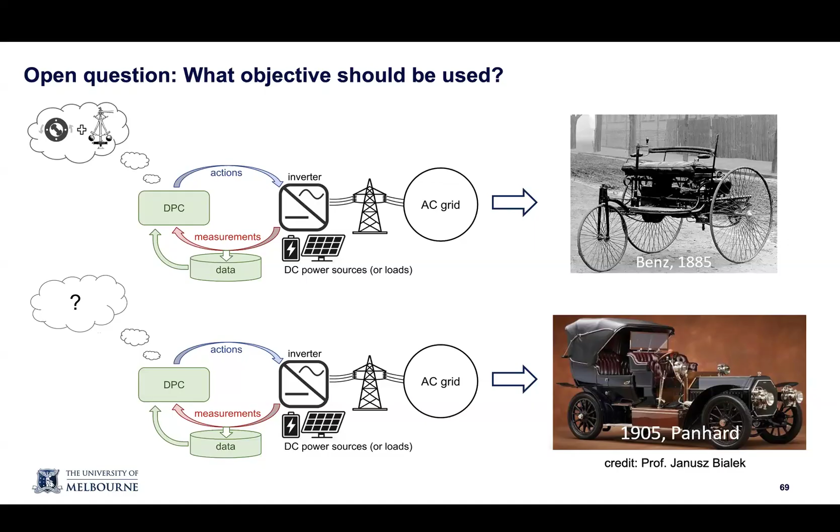We go back to the point when you discussed the different time scales of optimization and control in the grid. You always see in power systems there's kind of two groups doing optimization and control: those that are in the steady state, and they assume that I'm sending set points to some control algorithms and they will take care of it. Similarly, from the dynamic side, they're saying, okay, we're going to receive some optimized trajectory that I'll just simply follow. And these people have never talked before.

Exactly, and due to that you reach a lot of suboptimalities, because now the multi-period OPF folks, they give you two points and then they assume that there exists a feasible trajectory between these two consecutive points. And then same for the other side, they just try to match these consecutive points. So relative to the last point that you said, what is the objective function? I just want to hear what's your thoughts on these two.

I mean, it's a very good question, because with data-driven methods and inferencing, the time scale is closing up. Which is, do these two groups need to talk more? Or should they talk more? And I think yes, but it's important to remember just the breadth of timescales that we're looking at.

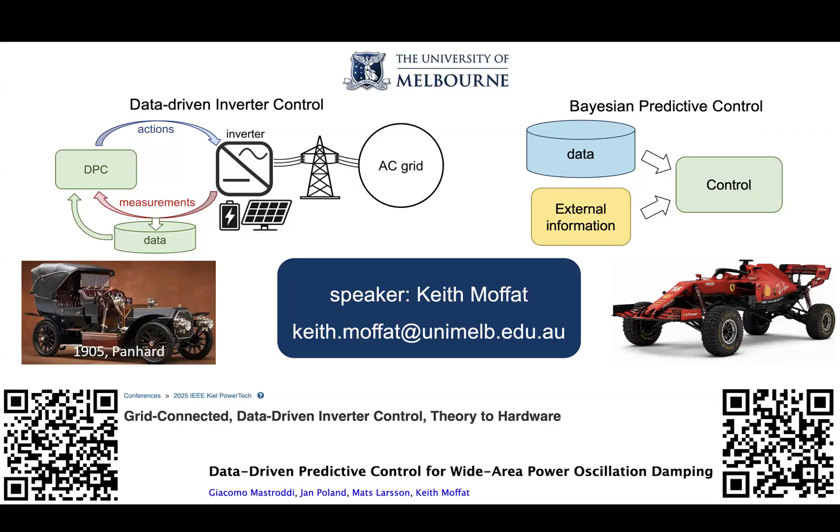So markets are about efficiency, but at the end of the day there's kind of a line you don't want to cross in terms of stability and these sorts of things. So it's important to remember just the importance of resiliency and always having the lights turn on. There's different time scales, different value scales, and all sorts of things to consider that make it a very rich research problem that everyone in this room should work on. Super.